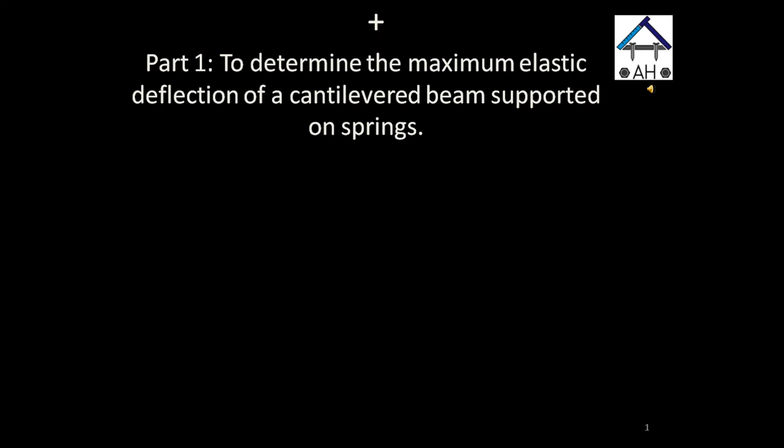Our aim in this video, part 1, is to use the method of superposition to determine the maximum elastic deflection of a cantilevered beam. The beam is fixed at one end and supported onto springs at the other end, and the beam also carries a uniform distributed load.

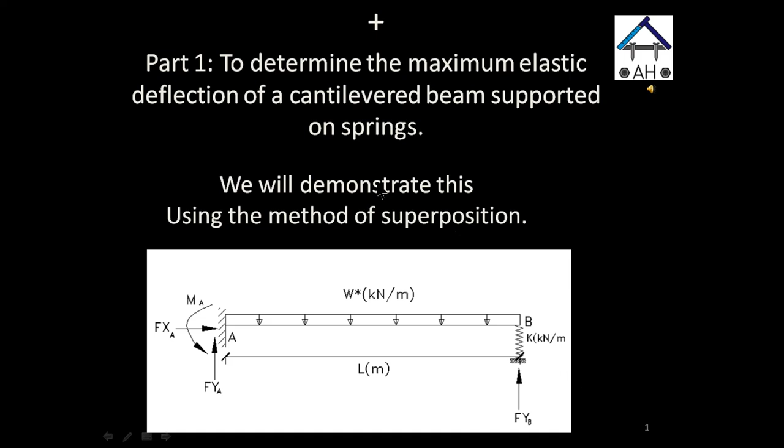The reason I chose this topic is because we come across this model frequently in our day-to-day designs. A good example of spring supports could be soil, which has a particular stiffness, also called a modulus of subgrade reaction. We could have a strip footing or a stiffened raft slab on ground, with soil modeled as a series of area or line springs underneath the footings, further modeled using finite element software. Oftentimes we could also have a suspended slab onto piers or piles founded into soil, and the soil supporting these piers could also be modeled as springs.

Let us take a simple example of what I'm trying to demonstrate here. In this example, we have a cantilevered concrete T-beam fixed at one end and supported onto a concrete pier at the other end. Hypothetically, this T-beam could be taken from a suspended raft or a waffle slab.

The concrete pier at the end is founded into soil, and the soil has a modulus of subgrade reaction of 1,500 kilonewton per meter, which is the stiffness. This really means that the soil has the capacity to compress 1 meter under a load of 1,500 kilonewton.

Theoretically, there are 6 degrees of freedom at the spring supports. However, for simplicity, we will look at the problem with a single degree of freedom to allow for vertical translation only. Although the spring could be in tension, for this example we have compression only, so we will ignore any rotational or lateral movement of the springs. If we were using the stiffness method of analysis, we could probably work out these extra parameters if needed. So here we want to work out the maximum immediate elastic deflection at the springs.

The information given in this problem is as follows: the beam length is 3,600 millimeters. The soil has stiffness K of 1,500 kilonewton per meter. Young's modulus of the concrete, E, is 24,000 MPa. The uncracked moment of inertia of the concrete is 1.23 times 10 to the power 9 millimeters to the power 4. EI, the flexural or bending stiffness, simply E times the uncracked moment of inertia, is 2.95 times 10 to the power 13 Newton millimeter squared. We also have the factored load W given to be 25 kilonewton per meter.

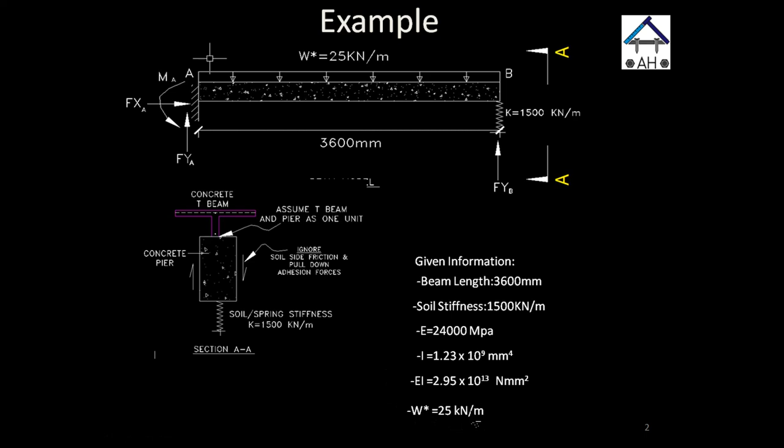Before we start, there are 6 important assumptions we had to make prior to calculating the deflection. Number 1, we assume that the beam is supported hard onto the pier with no gaps, which means we will ignore adhesion, pull down force, and any side friction onto the pier.

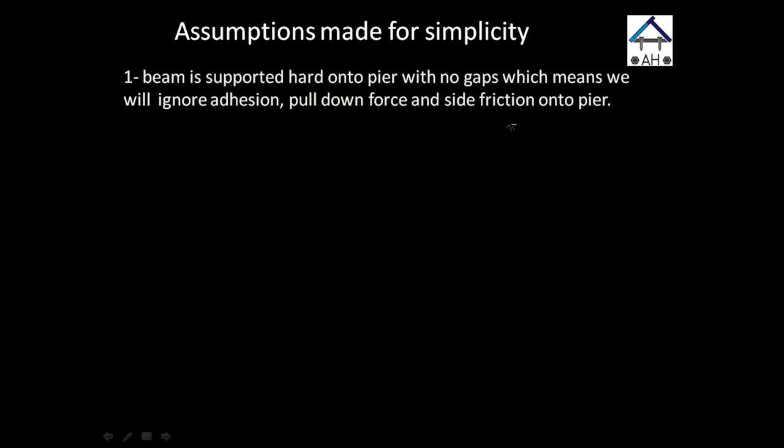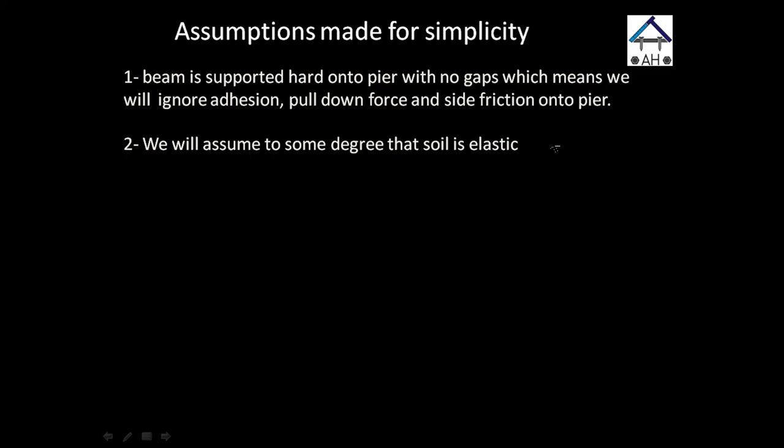2, for the sake of simplicity, we will assume to some degree that the soil is elastic. Otherwise, it would be a complicated problem and we'd probably need to use a nonlinear analysis approach. 3, we will ignore the self-weight of the pier and assume that the pier and the T-beam are one unit throughout the entire vertical translation.

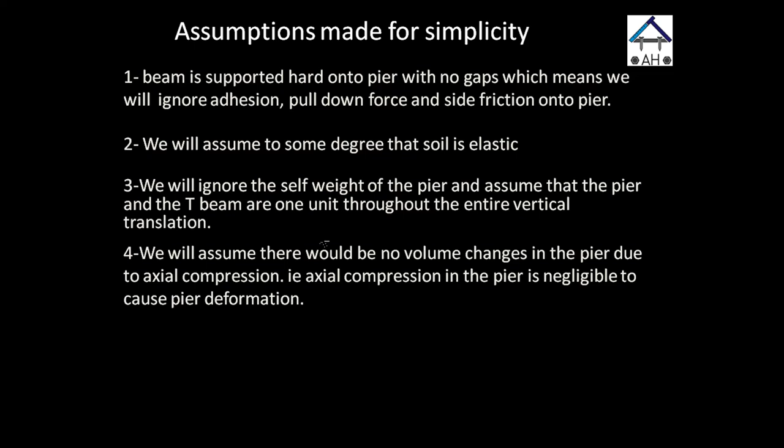4, we will assume that there will be no volume changes in the concrete pier due to axial compression, i.e. axial compression forces in the pier are negligible to cause vertical deformation. Otherwise, we would probably have to consider this in the additional deflection of the overall beam. If there was some deformation in the concrete pier, we would have to consider that in the overall deflection of the beam, so we will ignore that.

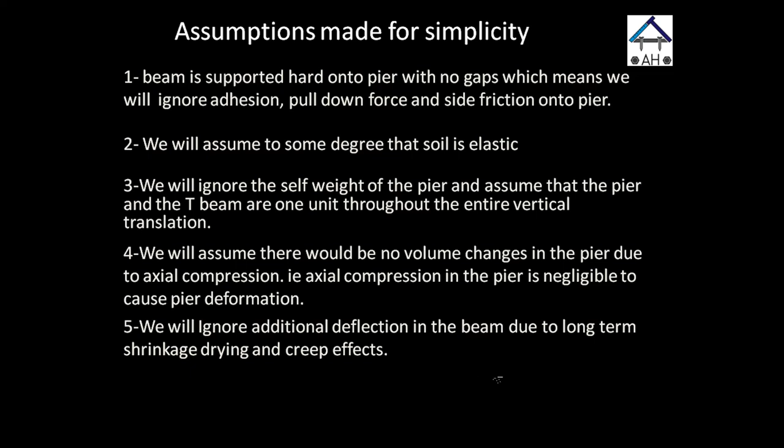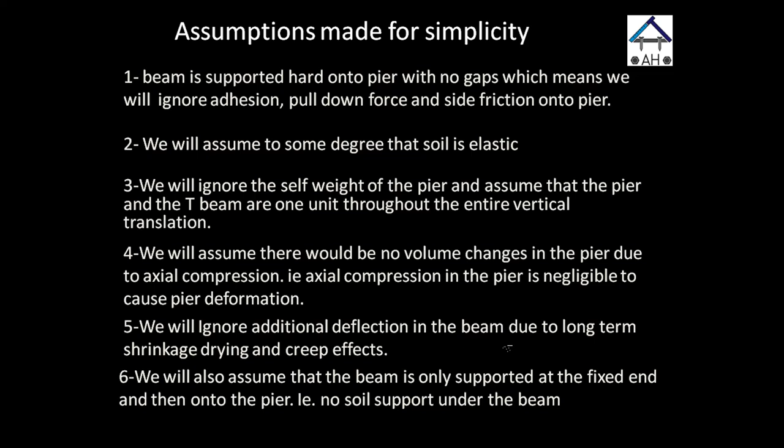Number 5, we will ignore additional deflection in the beam due to long-term shrinkage, drying, and creep effects. 6, we will also assume that the beam is only supported at the fixed end and then onto the pier, so there is no soil underneath the beam. It is probably the worst case scenario, unless of course we have soil heave under the beam, which is a different case altogether.

The calculation process: the first step is to work out the determinancy. The number of unknown reactions in this case is 4: FXA, FYA, MA, and FYB. The number of available equations of equilibrium is 3. We all remember the equations of equilibrium are the sum of forces in y, sum of forces in x, and sum of moments.

So the beam is indeterminate to the first degree. The number of unknowns minus the number of available equations is 1; 4 minus 3 is 1, and therefore it is indeterminate to the first degree. If the number of unknowns is equal to the number of equations, then it's statically determinate.

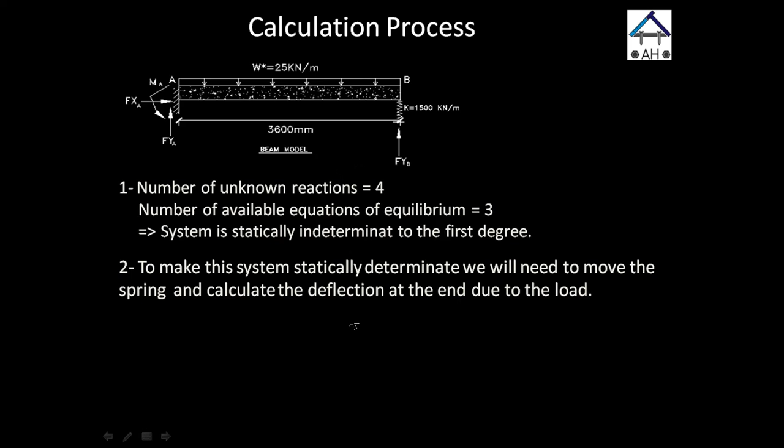So to make this beam statically determinate, we need to move one support, and that is the spring. We will need to remove the spring and calculate the deflection at the end due to the distributed load only. That's the first step.

So we'll calculate the deflection delta T of a cantilevered beam with a UDL, and the equation for that is WL to the power 4 over 8EI.

Look, I've memorized this, but you can derive that from the double integration method, moment area method, or conjugate method. There are many methods you can use. You can even find it in the back of any engineering textbook.

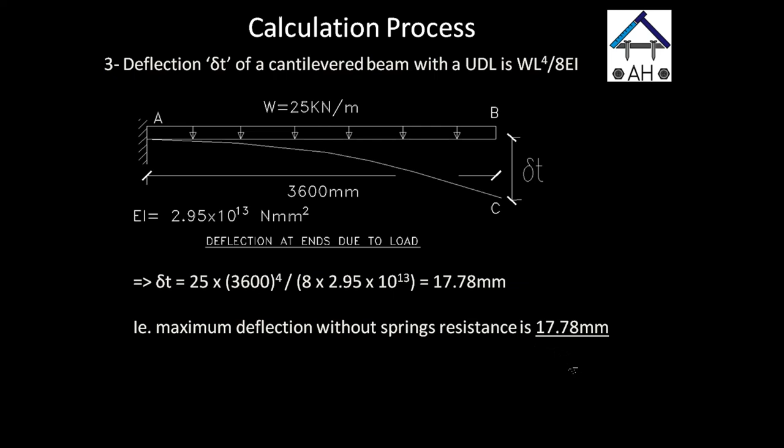So we'll work this out. Delta T, which is the total deflection due to the load, is 25 times 3600 to the power 4, divided by 8 times 2.95 times 10 to the power 13, which gives us 17.78 millimeters. This means the deflection under the distributed load alone, without the resistance of the springs, is 17.78 millimeters.

Now we need to calculate the compression displacement delta R due to the reaction FYB at the springs. I call it delta R as in delta reaction. The compression in the springs is basically how much vertical displacement the reaction FYB at the spring caused to push back that beam from point C to point D.

So we know under the load alone, without the springs, the beam deflected 17.78 millimeters, which is basically from point B to point C. Then, due to the spring reaction, we will theoretically get an upward movement from point C to point D.

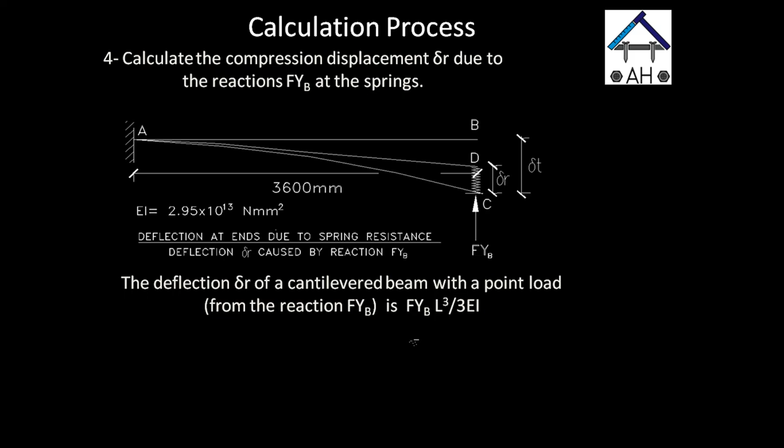The deflection delta R of a cantilevered beam with a point load, from the reaction FYB, is basically PL cubed over 3EI, where P is the force, in this case the reaction FYB. So delta R equals FYB multiplied by the length cubed, which is 3600 cubed, times 1000, divided by 3 times EI, which is 2.95 times 10 to the power 13. That gives us 0.526 FYB.

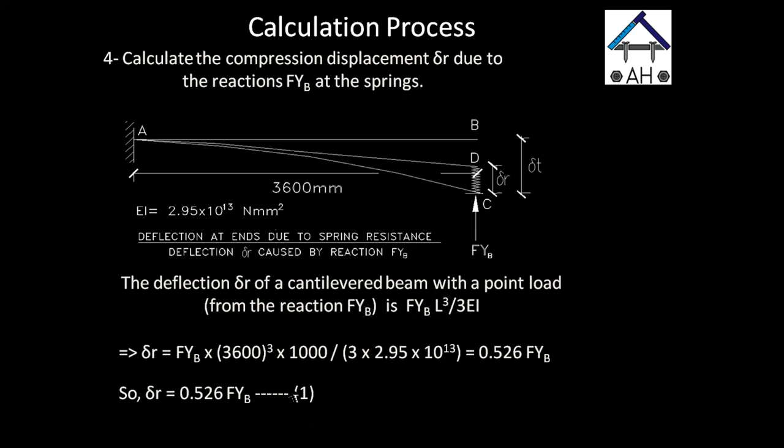Please note we multiplied it by 1000 to change the units to millimeters, to be consistent with all the units as millimeters. So our first relationship here between delta R and the reaction is 0.526 FYB, and we will call this equation 1. Remember this, that will be our equation 1.

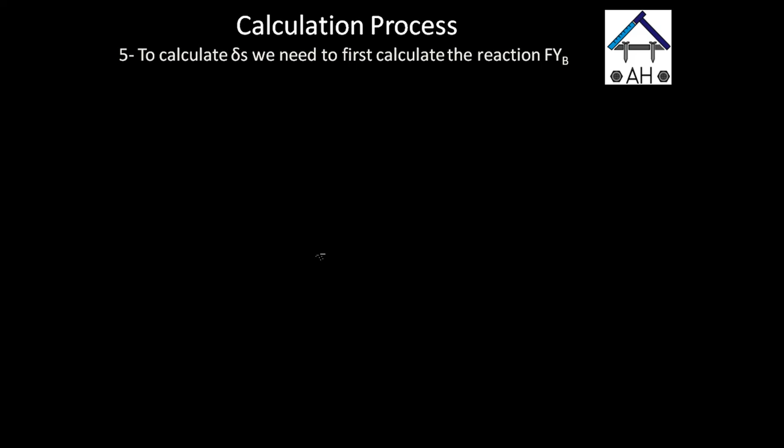Ultimately, we need to calculate delta S. But to calculate delta S, which is the compression in the springs, we need to first work out the reaction FYB.

We know Hooke's law, that F equals Kx, which is the stiffness times the deflection. So in this case, the compression in the springs, delta S, equals the reaction FYB divided by the stiffness K, where K equals 1,500 kilonewton per meter. Therefore, delta S equals FYB multiplied by 1,000 divided by 1,500, giving us 0.66 FYB. Again, we multiplied the reaction FYB by 1,000 to change the units to millimeters. This is our second relationship between the compression in the springs and the reaction, and we will call this equation number 2.

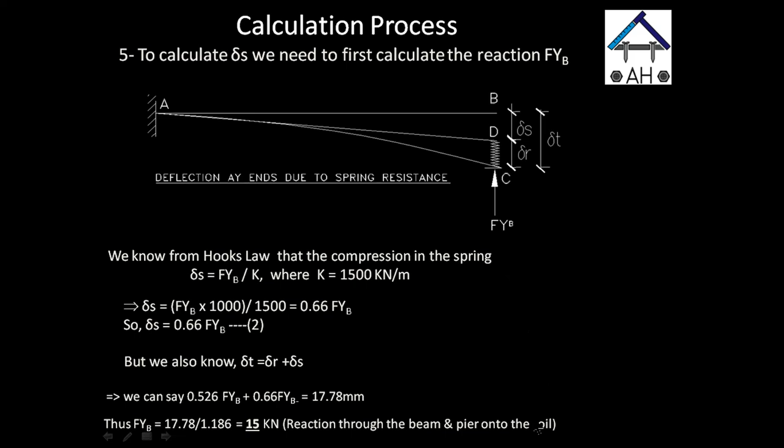We also know from the deflected shape, as you can see above, that the total deflection delta T is basically equal to delta R plus delta S, and from the previous slides we worked it out to be 17.78 millimeters. So equation 1 plus equation 2 equals delta T, meaning 0.526 FYB plus 0.66 FYB equals 17.78 millimeters. Working it out, the reaction FYB equals 17.78 divided by 1.186, which gives us approximately 15 kilonewton. That will be the reaction through the beam and the pier onto the soil.

Now we can calculate the final maximum deflection delta S, because we found the reaction FYB is 15 kilonewton, and from equation 2, delta S is 0.66 FYB. Therefore delta S equals 0.66 times 15, giving us 9.9 millimeters, which is the maximum deflection from point B to point D.

We need to remember the deflection is measured from the beam's centroid, the beam's neutral axis. Also from equation 1, delta R equals 0.526 FYB. Therefore, delta R is 0.526 multiplied by 15, giving us 7.88 millimeters. So the springs have basically offset, or provided a relief of 7.8 millimeters, which is a theoretical upward translation from point C to point D.

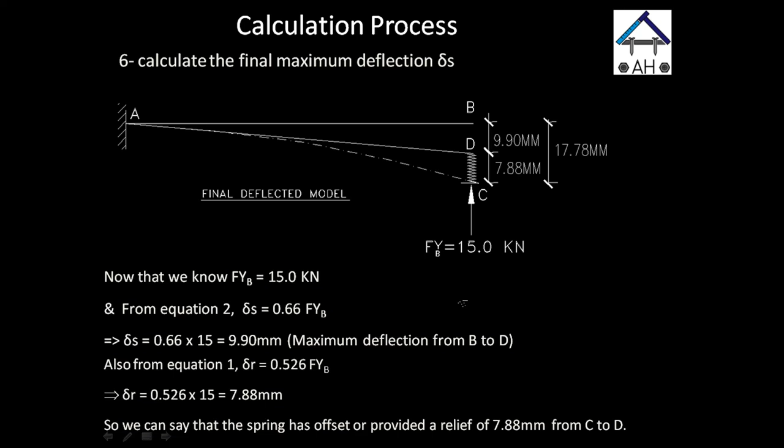We also did a quick check on that with Space Gass, which is a finite element program, and we got almost exactly the same answer. As you can see in the diagrams below, the deflection is shown to be 9.92 in Space Gass, and we got 9.9, which is virtually exactly the same result. The shear force reaction at the springs in Space Gass was 14.88 kilonewton, and we got about 15 kilonewton, which we rounded up anyway.

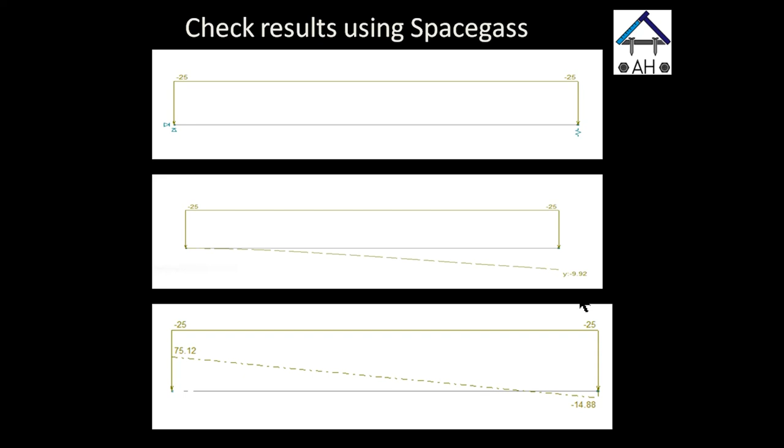Very similar results. So yeah, that's it, I think. I hope this video was useful.

In part 2 of the series, we will proceed to calculate the reactions, maximum bending moment, and maximum shear force in the beam. From then on, we can calculate the T-beam section capacity. We will actually need to draw the bending moment and shear force diagrams to work out the positive and negative values, like the positive and negative moment and shears in the system. From there, we can work out the flexural and shear capacity of the T-beam in sagging and hogging.